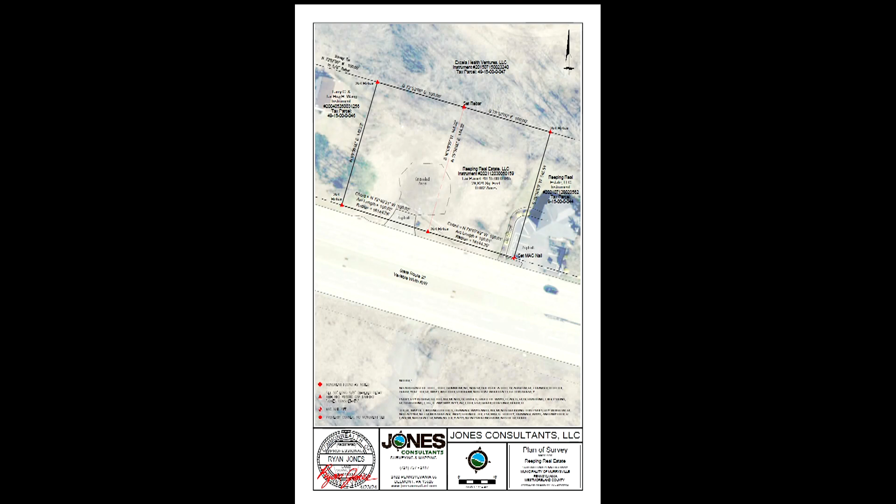Let's go to the next slide. This is the survey that was prepared by others that we've used for the proposed site plan. This was the plan that was submitted as part of the conditional use application, showing the outline of the property in red, and we put some color on the slope areas around the property.

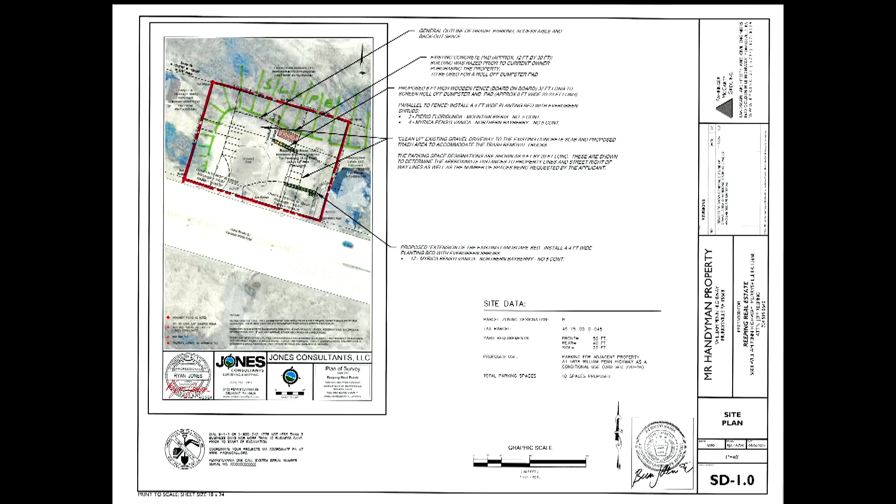Mr. Reeping found as part of the property that the concrete slab for the house or structure that was on the property was there, just covered over. He removed the dirt from that and plans on using it for a roll-off dumpster for his employees to occasionally unload building materials, since it's a property that can be accessed easily by the trash hauler he's hired. Let's go to the next slide, which is an enlargement of the site plan.

In addition to reusing that concrete pad, he proposes to build a fence in front of it to screen the dumpster. This would be board-on-board. Some of the structure is already there, and he was asked to stop. The plan proposes some landscaping in front of that fence, as well as an extension of the planting that services the existing office building.

We've shown on this plan the number of spaces, even though it's gravel and won't be painted or striped, we wanted to show compliance with the dimensional aspects of 10 parking spaces. This would be reusing the driveway curb cut that was already there as part of the Route 22 widening a number of years ago.

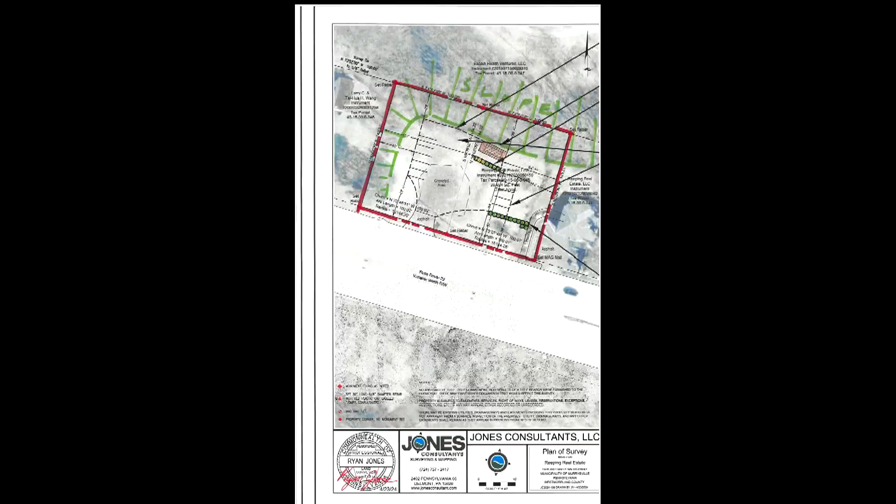What I wanted to show also for the Planning Commission and for the record are some historic photographs, to show what was there - a building and a gravel access drive.

So you mentioned there was landscaping? You're going to put some screening? Yeah, on the site plan there's some shrubs in front of the fence and shrubs along the parking space closest to 22, and an extension from the current landscape island that's around the existing building. So the existing parcel has the hard surface parking with handicap access and everything like that.

So there really isn't any improvements happening here. This is a little bit of an odd proposal in that respect. So what are the next steps for this project? Is there a site plan that'll be required to follow this up?

I believe that they did submit a site plan. The image that's up on the screen is a portion of the site plan that was submitted. I think the intent is to gain approval of the conditional use to allow vehicles to be parked here and the dumpster. I think everything else is addressed on the site plan.

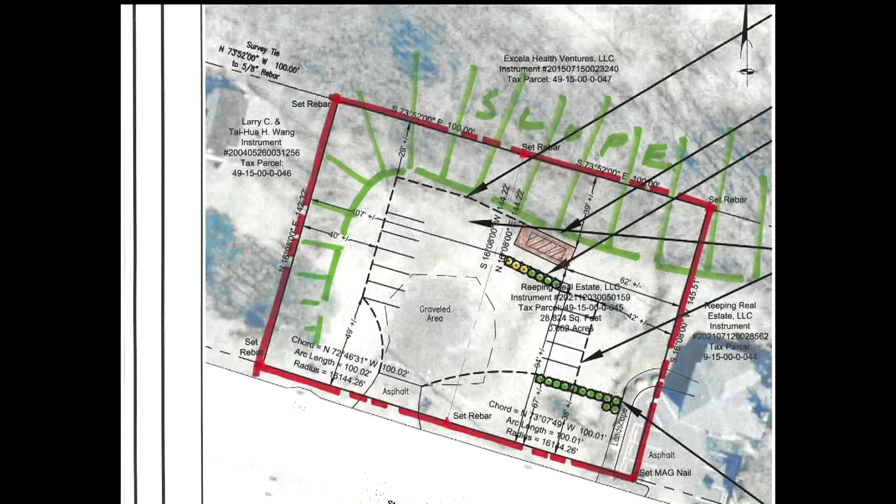Okay, well, that was my question. Is there another approval that this needs to go through other than the conditional use? Or is it just the conditional use with this site plan that they've submitted? It would just be the conditional use. Okay, yeah, that would be the only one.

Okay, I just wanted to make that clear since it's a little bit of a unique situation with basically no improvements. Does anybody else have any questions? No? With no one here in the audience, I don't think we have anything else either.

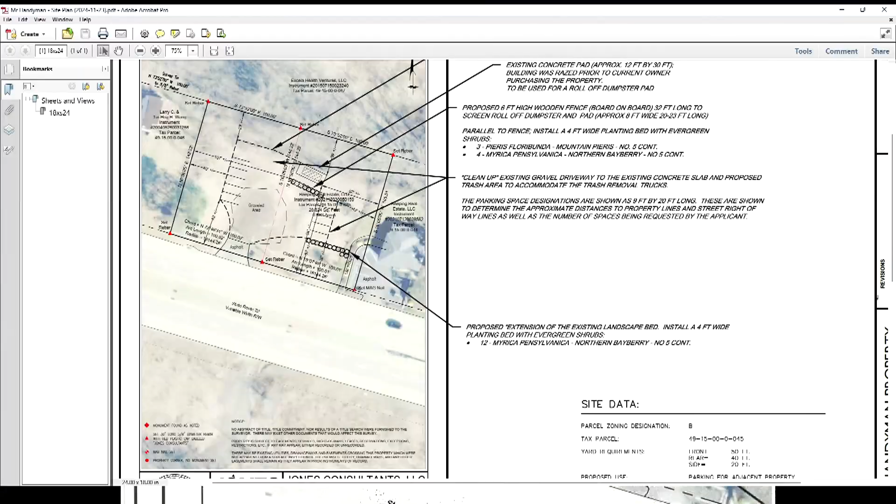Just from staff's review of this project, one of the concerns we had was relating to the parking. It was discussed, the surface of the parking lot. It was discussed that it's going to remain as a gravel lot, and I think that historically there has been some feedback and some concerns with planning and council as far as gravel lots are concerned.

The section reference was 22068A5, which indicates it should be an impervious surface, or a pervious surface that is similar to an impervious surface. Now, I'm not sure historically what that means for planning and within the municipality, but that would be the one concern that staff had, and the other being that, again, the plantings and the vegetation provide an adequate screen for the property.

I have the image pulled up here, and I'm not quite sure if we pull that image up onto the screen, if these are the only plantings that are going to be installed on these two locations, or if it's also going to surround the lot as well.

That was the intent, just those plantings to screen the trash area and the gravel area, which has 4 or 5 spaces along that side of the property. It was just a natural extension of the existing landscape bed that's also noted there. It's sort of an upside down J, yes.

The left-hand side is a cut slope, and there is natural plantings between this property and the adjoining property to the left, so we were not proposing any plantings in this area on the left.

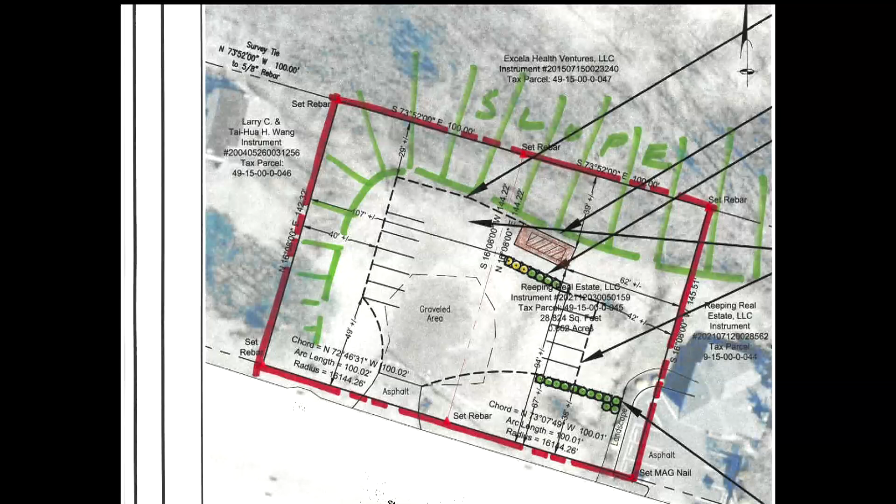And as one of the perspective images that we showed from Google Earth, this sits up above Route 22 as well, and some screening there along the house on the right-hand side, or along the office, I think would help and makes natural sense.

On the left, I'm not sure there's anything that really sort of ties it down. I think it would look a little odd, to be honest with you, if there were some shrubs planted there to screen that side. I think, as we said, the slope and the natural plantings, natural vegetation along that edge adequately protects the adjoining property.

Okay, so yeah, that is the feedback from staff.

Otherwise, the use is appropriate and does fit in the district. It makes sense, I guess, based on the nature of the business next door, why they do have the need for the parking. So that's the feedback from a staffing standpoint.

Okay, well, does anybody else have any other questions? With there being no more questions or input, is there any reason we can't close the public hearing, in your opinion? No, I think you can close the public hearing.

Okay, so you accept the motion to close the public hearing then? So moved. Motioned and seconded. All those in favor, say aye. Aye. All those opposed? And there are none. Wait, excuse me, what is the motion, please? To close the public hearing.

Yay. Yes. Okay, thank you. Okay, so the public hearing's closed.

Now, the next step would be then to come back for the formal approval for this thing, right, and go through the process. Can that happen tonight? Can a recommendation happen tonight? To be able to move to council?

Certainly. Are we approving a site plan here, or is just the conditional use of a parking lot? It's listed as a public hearing on the agenda for the conditional use of the parking lot to be on an adjacent property where the actual use is not located. Basically, the business is on the neighboring property lot.

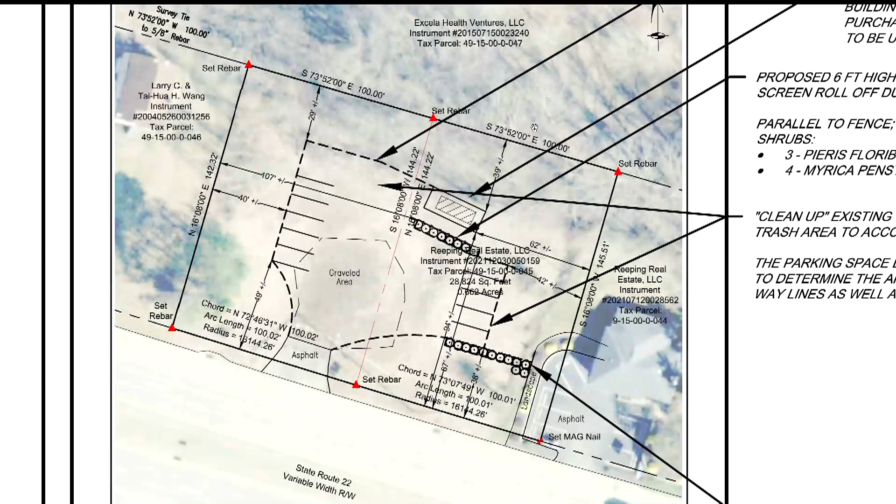By survey — and we have our own survey crew, though we did not do this particular survey — I know our crew, when they go out to a site, will say 'well, that's sort of where the gravel ended, but there were weeds there.' So maybe not clearly identified as gravel, but from some of the street view images, you can see that whole front area was gravel back in 2003 when the business was there, where the dumpster's located. Over the years, weeds maybe have grown up into it just like any other gravel surface. This just happened to be what the survey depicted as the gravel area.

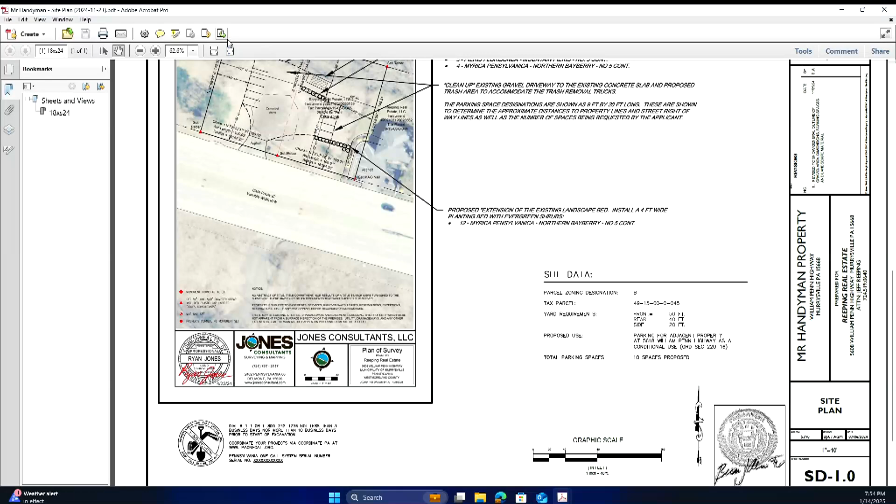Trying to skip through the other view — yeah, I understand, I was trying to find what's in the erosion control manual for that meaning set. I know DEP has recently changed their definition; I believe it's 0.86, but don't quote me on that. If that's the case, it's higher than 0.85. I'll be honest, I did find that section as well, and that's under the supplemental regulations, landscaping and buffering section of the code.

What is the landscaped section where it says... I have it under 220-51C1A, is that where you're reading that? Or 220-68 for off-street parking and loading? Because it's also noted in the supplemental regulations, but that's under landscaping, about the curb needing to be constructed of asphalt or durable material. I'm sorry, that's what I was reading. No, this is under the off-street parking and loading section, under the zoning.

So I think that's the homework here. Figure out what those values are and work it out with staff, then come back here next month for a recommendation, not approval. Okay, well, I understand. Okay.

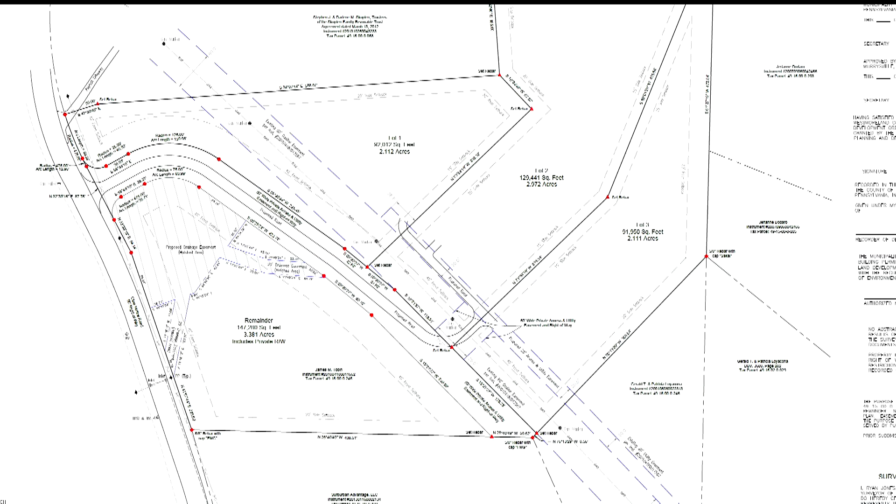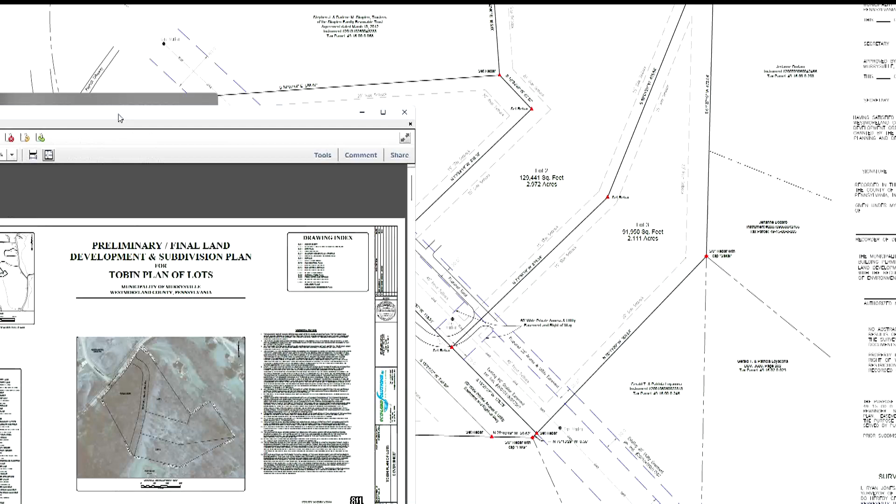Mike, you have the grading plan there? Maybe that might be more appropriate to look at, as part of the land development file. Yes, I have it right here. Yeah, that'll show some more of these details. It should be that 4th page. That one? Yeah, there we go. You can go back and forth on there if you'd like. Oh, I can, with the clicker, it can go back. I'll end up messing something up there.

This is that small infiltration trench that I talked about. Each lot will have its own little rain garden or bioretention facility that'll treat each yard and each home. This infiltration trench is only about 10 by 60, so it's relatively small. It's going to discharge and connect into this existing storm drain system, which goes down Cline Hollow Road and discharges directly into a stream, which meets the definition of off-site stormwater.

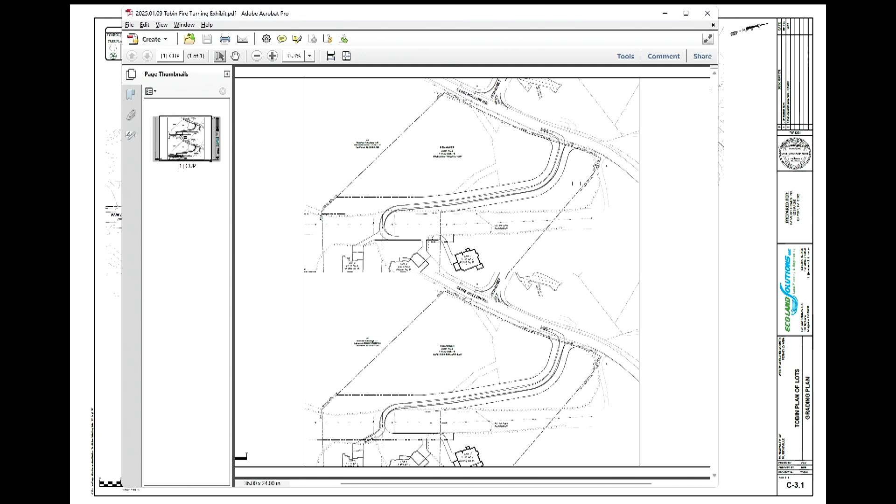Would this be considered a driveway or a private road? I don't know if that distinction matters. The question I'm going toward is, will there be some sort of maintenance agreement, or who will be responsible for maintaining this? Yeah, that was one of the comments, and that's what we said - we'll supply that for the solicitor to take a look at and review. That would be something that would have to be completed and recorded. I've seen those placed on a subdivision plan before, because they don't need to be that lengthy, but that would be something that will work, just to make sure the solicitor's okay with that.

Chris, can you go to page C-4.1? The graph on the left, can you kind of explain what that is? Yeah, I'll walk up here. You may need a mic.

This is the profile for the driveway, so it's looking at it, but it's exaggerated, like 1 to 10. So this is where it accesses it, and here's where we're coming up - I believe that's 15.0 or 14.9. It comes up, flattens out a little bit, goes up again, and then flattens out as we're crossing this gas right of way. I believe this line here is right where the gas line is - you can see this little dash line. That's the existing grade; the dark line is the proposed grade. This line represents where the gas line is located, so you can see we're hitting it right at the existing grade.

What is that slope? 15. 15, 15, okay.

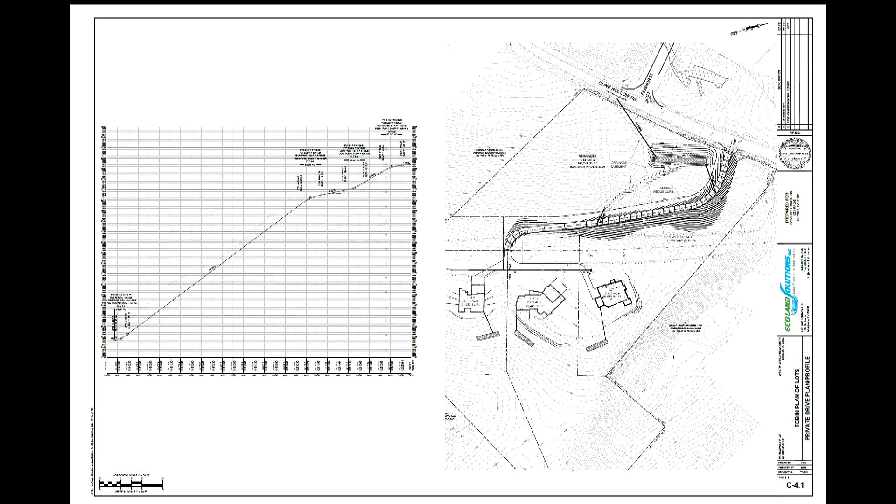So you don't have your NPDES permit yet, Chris, do you not? No, that's something I expect probably in the next 45 days, I would say - 45 to 60.

Okay, so that would be a condition of approval then. Yeah, I think those third-party approvals, there'd be several, with FTMSA and the Conservation District, would need to be a condition as well.

Chris, what's the elevation at the top, roughly, the high point of the road? Right around 1,100, I believe. Okay, so you're going to run a water line all the way up to the top of the hill? Yeah, that's been discussed with MAWC, and they've given the applicant guidelines for how they want that done.

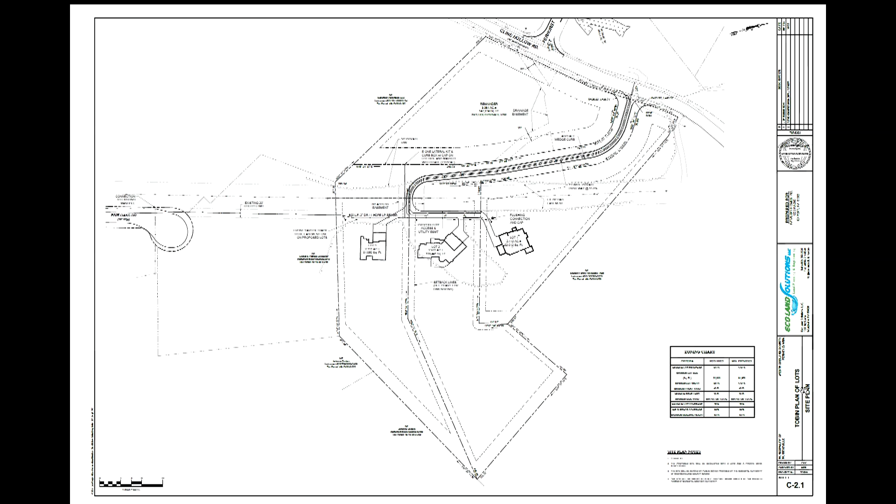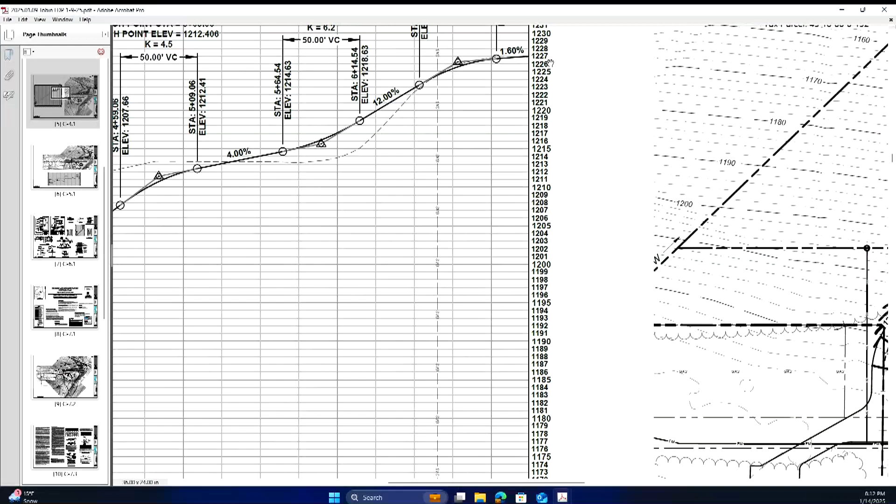So what's the vertical drop? Is that located on here? I can zoom in, it is, it's on 4.1 with that profile. Bear with me once I get zoomed in. You'll probably be able to read those numbers on your screen, Mike. Oh, there we go. We're talking about an elevation here. It's 1,200 up top, 1,228.

Down at the bottom is... it's a hike.

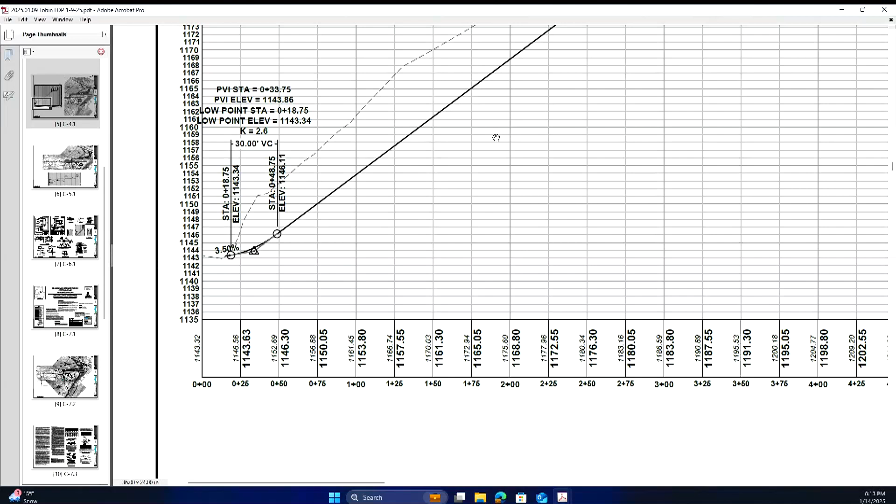So, and MAWC can serve that? As far as I know, yeah. I mean, they were given all the information.

Okay, and you have a letter of approval from them, I assume? No, but we will get that. Okay.

I guess you're not going to need a regulator up top to control pressure. Yeah, I think, Mike, do you recall what size they wanted that line? Yeah, so they wanted each one to have their own separate line. I just wanted to confirm each house is going to have a 2-inch line, which is what Bob was referring to with that elevation difference. No one runs a 2-inch line to serve a single-family home, but they want that additional capacity because they have enough pressure and capacity up there.

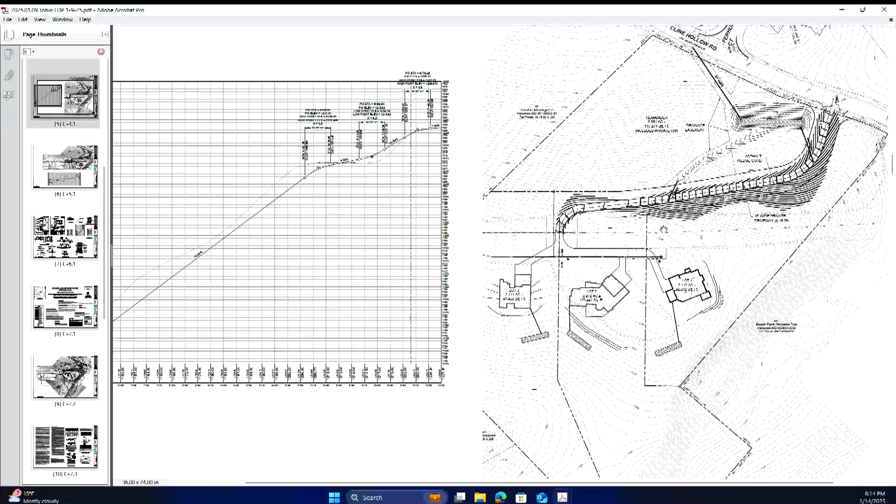Isn't the stuff on the other side of the road, the other plan that Patulski did, higher in elevation than this? There are some, up there on top of the hill, very high, yeah. Yeah, it's higher than this. They're served over there. That's a good point. Those lots on top of Barrington might be the highest point, if not the highest point in Murrysville, one of the highest. Not much is higher than that. I think they might be like 80 feet higher than this at the top here.

So if this is for final approval, is that correct? It would be preliminary and final since it's a minor subdivision, and preliminary final land development are the same.

Okay, so the conditions that would be imposed: obtain NPDES approval from the Conservation District, approval letters from the gas company to cross their main, approval from FTMSA and MAWC. Is there anything else that would be included? Mike, Jane, anybody else? Can't think of anything. The waiver of the fence requirement.

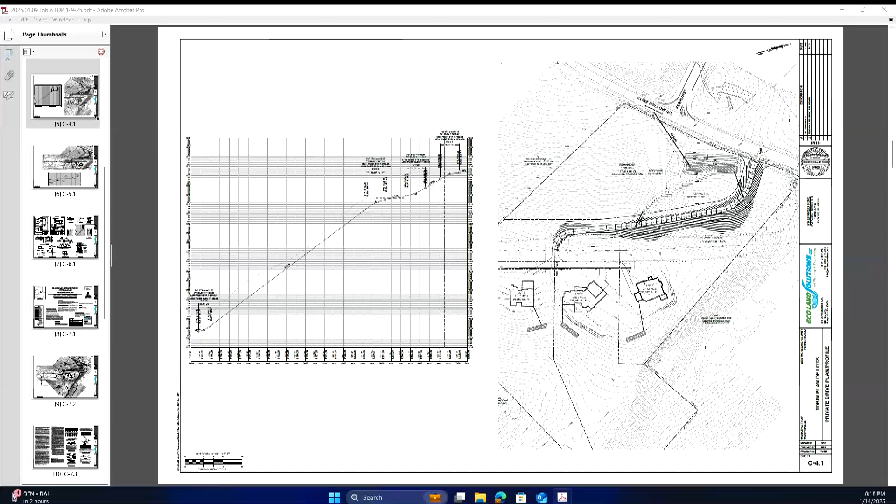So moved, Bob. We have a second. Bob, I'm correct in that you made the motion? Yes, sir. Okay, and we did have a second. Got second, third, and fourth. All those in favor? Aye. Any opposed? No. Okay, motion carries.

All right, thank you. I will return to my post. It's gonna be a great sledding hill.

Yeah, I know. There are no other items listed on the agenda for this evening. I don't know if planning has any other business to conduct or any other items for this evening. Seeing none.